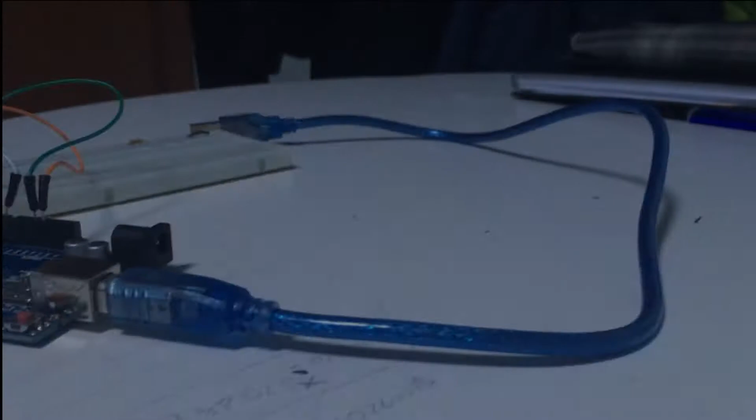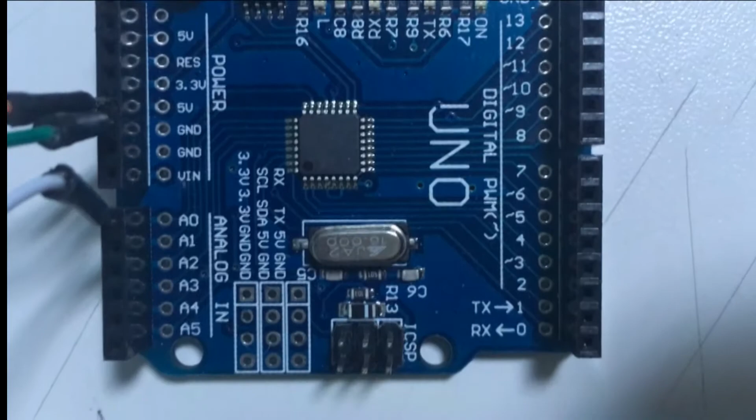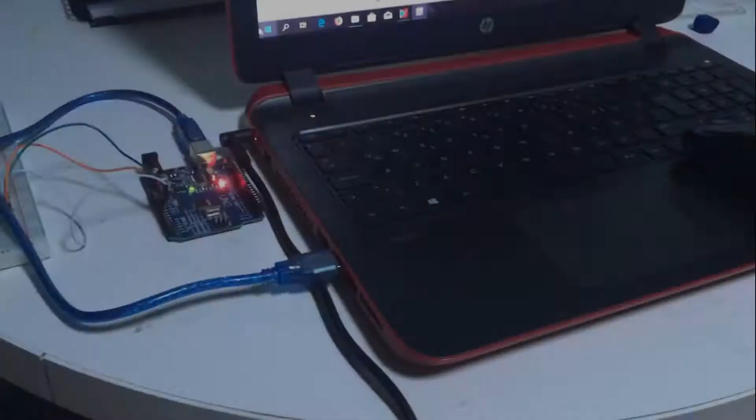Today I would like to introduce my project, which is a temperature indicator with LabVIEW. The main purpose of my project is making measurements instantly through connectivity between Arduino and LabVIEW using an integrated circuit. Firstly, let's check our components to make this measurement.

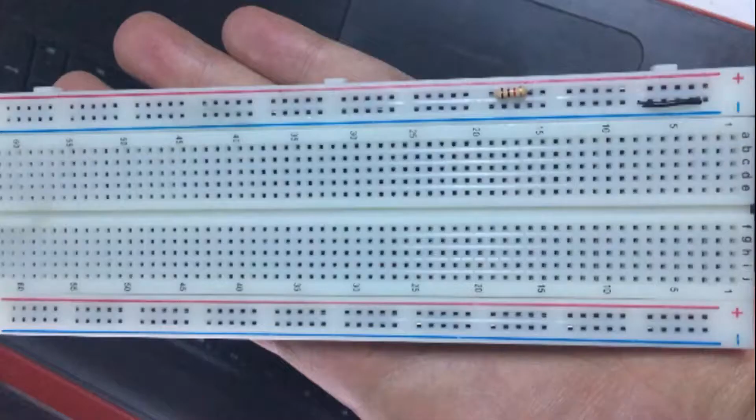Our components are LM35, breadboard, Arduino Uno, and 3 jumper cables. After the connection of these parts, we need to create the LabVIEW algorithm. Firstly, we need to write tables and visuals about the measurement. So, we want to measure Celsius, Fahrenheit and Kelvin heat in the area.

Now we are ready to make our algorithm in our LabVIEW program. This is the most important part of our project because we identified our algorithm in this section to LabVIEW. We need to start with reading analog signals to gain LM35's voltage data. After that, we are ready to make calculations to find the magnitude of temperature in the area.

Our logic is making a link between heat and voltage. LM35 calculates 1 degree per 10 millivolts, so we need to multiply the voltage of this signal and we will find the Celsius value. After that, we can easily find Kelvin and Fahrenheit temperature.

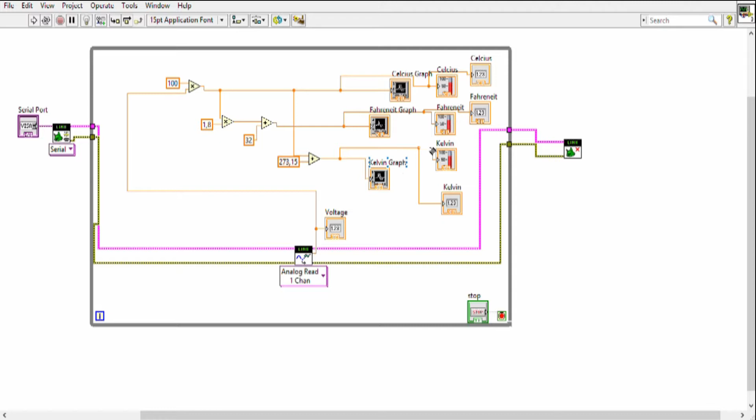After all these steps, we are ready to start our simulation to find the temperature of the area. Warning: we must not forget to choose the serial port to make the connection. We have already started our simulation and we can see room temperature as 20 degrees, and all graphics are able to show the relation between temperature and time.

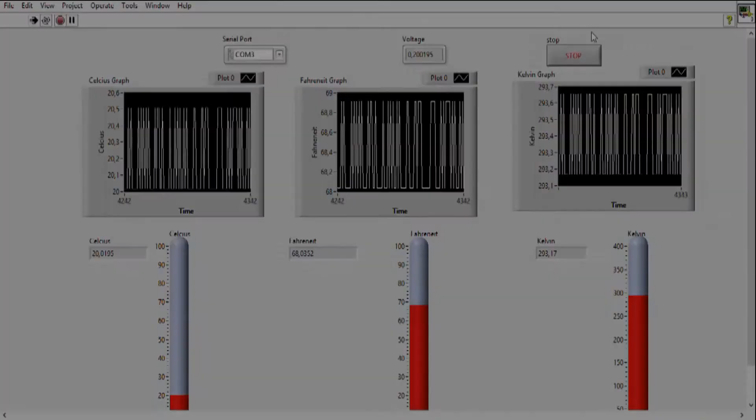Also, I would like to give an extra for you guys. I lighted the LM35 to increase temperature instantly because I want to be sure about the instantaneousness of the connection.